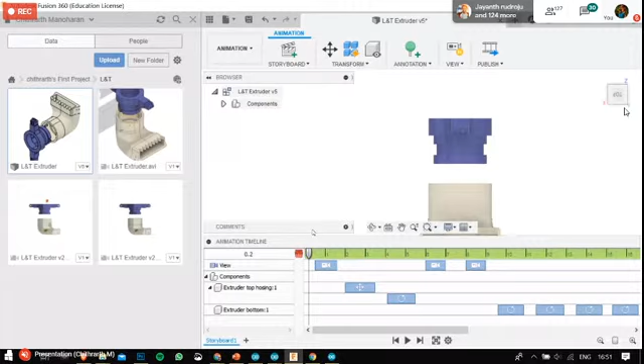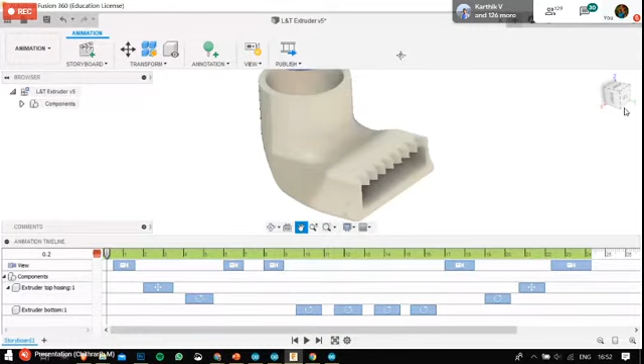So I would like to give you an example of how such extruders can be designed and built. So we were actually partnered with L&T some time ago, and we developed an extruder system for their contour crafting machine. So let me just quickly show you. So you could basically design your own extruder systems, get it 3D printed, and then you could start. So this is the extruder system which we designed for L&T, as you could see.

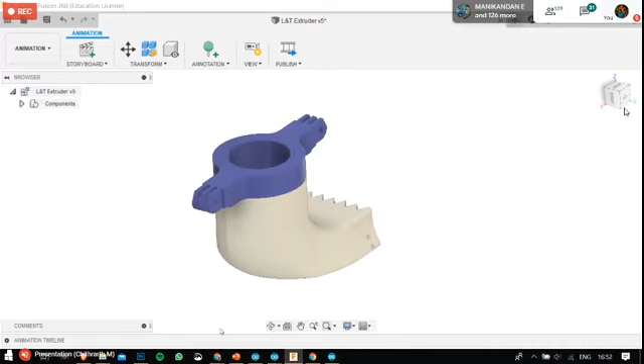So this one is used to rotate in different portions, and basically you also need to incorporate the mixing chamber on top, and choosing of different sensors and other stuff to measure the pressure and the flow rate of the different materials. So these things are all required to develop an extruder system.

And so this is basically a bare minimum skeleton, but this was our objective, and then we completed this and we handed it over to them. We 3D printed these parts and then we shipped it out to them. And in fact, they have been using this particular extruder mechanism in some of their prototypes. They are also trying to build a contour crafting 3D printer.

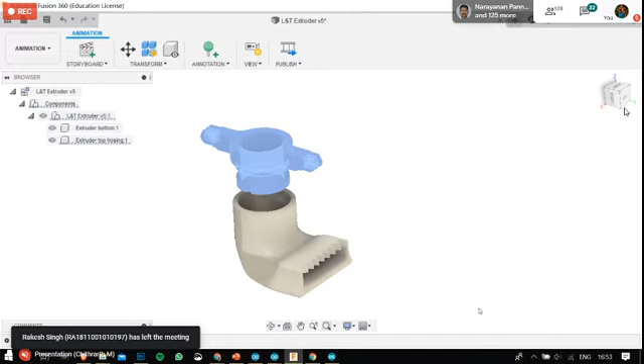And yeah, so a quick summary. Let's take a look at different things which we discussed today. I just gave you a glimpse into what electronics are in a 3D printer, and the software, the firmware part. What is the responsibility of a firmware, and also we discussed different mechanical parts. How to make mechanical motions. Different types of architectures which are available, like CoreXY mechanism, delta type mechanism, gantry type mechanism, and other stuff. So since we have a very limited time, I do understand we are going at a very fast rate.

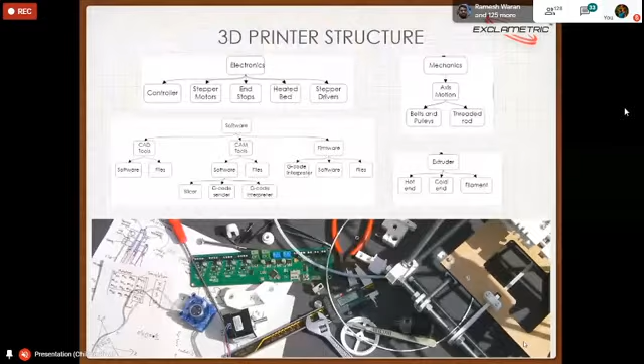To build a 3D printer, you need to have the skill sets in all these four areas. So you need to have skill sets in your electronics, mechanics, software, and do a lot of extensive research and development on the extruder as well. But hopefully, if you really have interest, you could definitely learn the different aspects a step at a time, and then you could really achieve it.

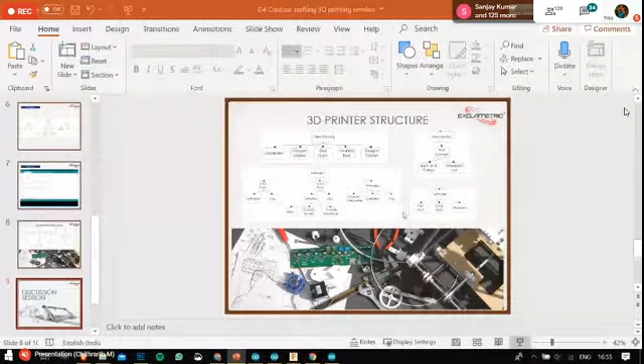Thank you, Siddharth. I think today you have covered the maximum on how to build a 3D printer for contour crafting. At the same time, I do feel a bit odd, because the topics we are looking at right now are extensive, and due to the time constraint we are looking at them at a very rapid pace.

Things like these require a lot of time to learn, right? But it's definitely not impossible. It's definitely not that difficult as well. I could guarantee that to students. It takes time. So I would again recap to our students, if at all they are planning

to build a 3D printer, it's the right time for them to order an Arduino Mega 2560 microcontroller. Because of lockdown, some companies are even delivering. There are certain online platforms; if not, students can try Amazon for getting an Arduino controller. With the Arduino controller, it's pretty easy for them to start working on the electronics.

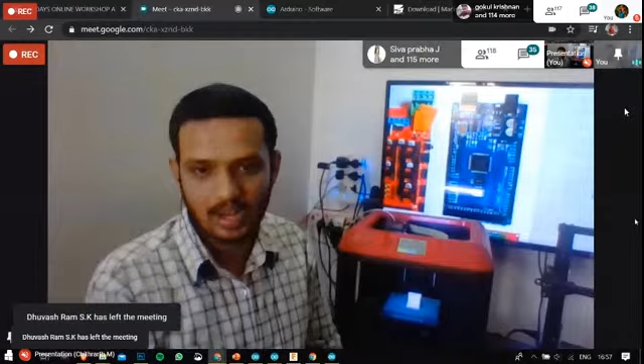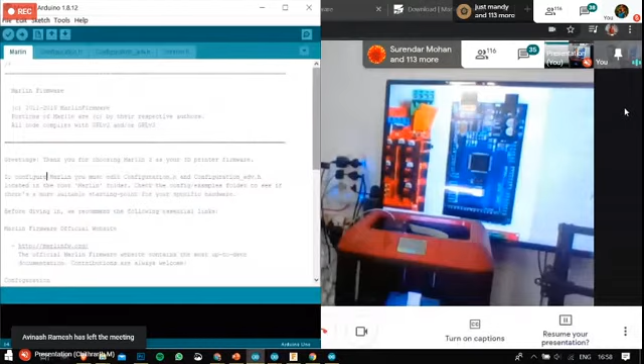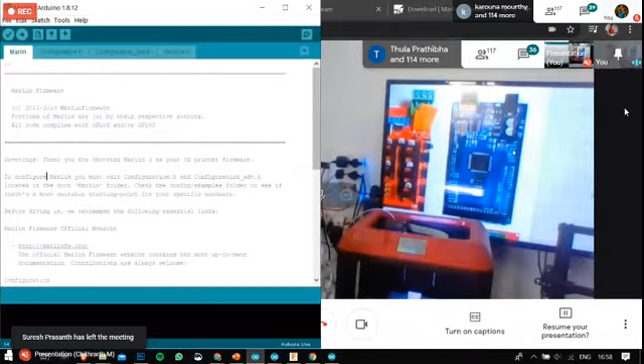For the firmware, you should be using Arduino, this particular software which we were discussing, right? We'll be loading the Marlin firmware here, and if you see on the screen, this blue part is the microcontroller. Once we connect the microcontroller with our computer, you have an option called upload. Once you choose it, the entire sketch will be compiled and the firmware gets uploaded. So for loading your firmware, you can't use Cura, you should be using Arduino.

Yes, sir. Back to you. I think that's it. No more questions are there. Okay, okay.

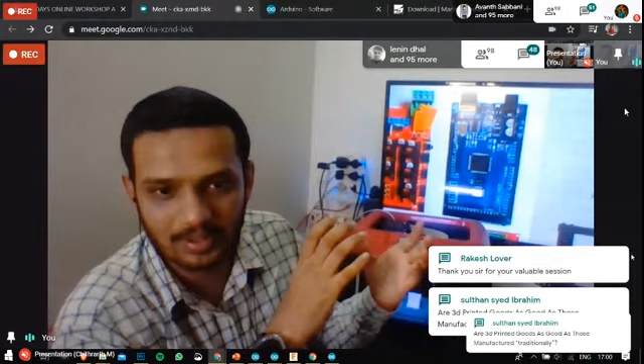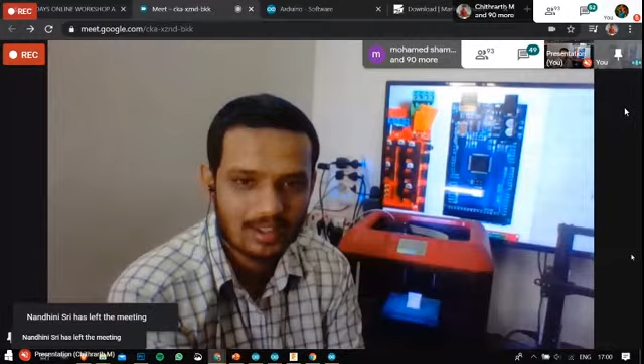You could get those CD-ROMs dead cheap, say for a couple of hundred rupees. For every individual axis control, you could use a CD-ROM's motor and other parts. Done that way, the cost of building a 3D printer would be around 6 or 7K rupees. So it's not very expensive. It's pretty cheap actually.

Next question from Mr. Gokul Krishnan: is this 3D printer used in our cities for ready-made walls or compound walls? Basically, contour crafting is still in the research phase. Till now, we don't have a commercially viable contour crafting 3D printer, but one company is promising to deliver it this year. Since it's in research phase, it totally depends upon the materials you plan to use.

We could hypothesize that you could directly print reinforced walls, like the renderings in our introduction sessions, implanting the rebars, plumbing, electrical ducts, and everything. Every printer takes its own approach. If you want any special inserts or compound walls, you could build a machine based on the research. I wouldn't give a very precise answer, because it's still in R&D phase.

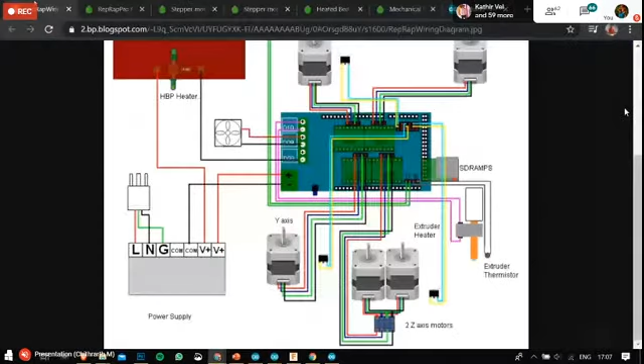If you want to manufacture certain custom parts, like the parts which I showed you, parts which you design and develop on your own, then using a 3D printer will be a much cheaper option, because you can't create an injection mold for parts like these. Injection molds are normally used for mass manufacturing, and the cost of a mold will run to several lakhs. So in areas like those, you will have a very high cost-benefit ratio using a 3D printer rather than traditional methods. So every technology has its own pros and cons.

Anish Gupta, what do you think, when will 3D printers be used by Indian construction companies? Yeah, so the Indian construction field actually has enormous potential for using 3D printers. The reason is because several companies, to my knowledge, are already into developing, even Indian companies, like say I mentioned L&T before. L&T is a company who does a lot of construction activities around the globe as well, and their main resource or main expenditure is actually manpower, right?